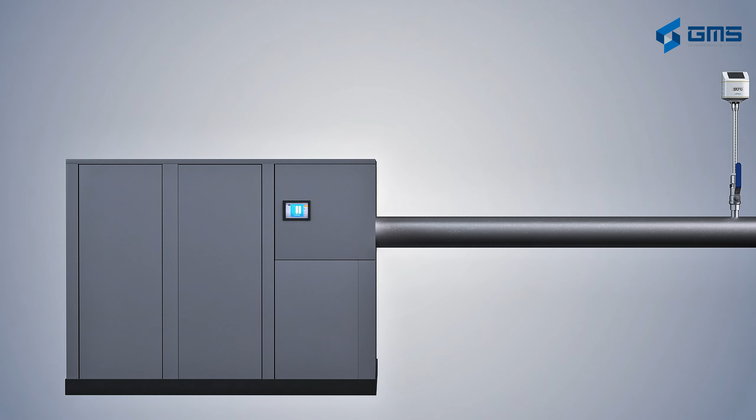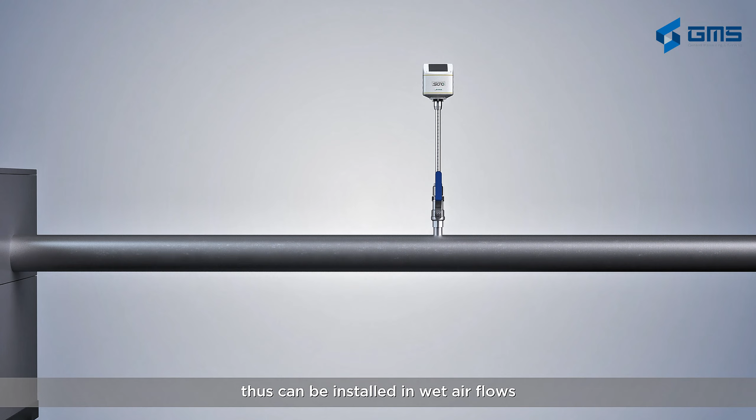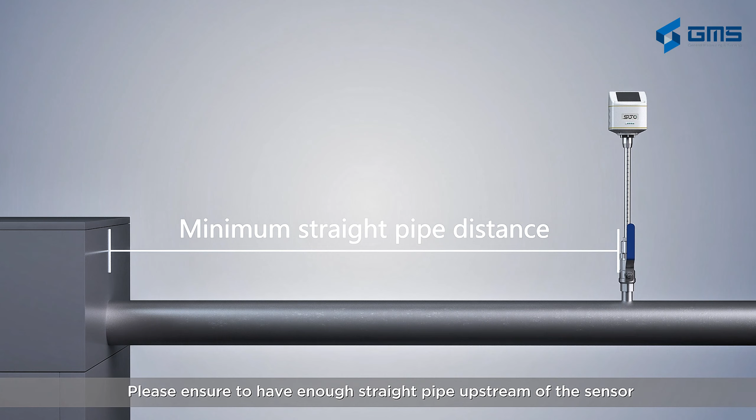In this video, we are going to demonstrate the installation and configuration of the SUTO iTEC Pitot flow meter S430. This flow meter is perfectly suitable to measure air delivery of compressors, thus can be installed in wet airflows. It's inserted into the compressed air pipe under pressure through a 3/4 inch ball valve. Please ensure to have enough straight pipe upstream of the sensor. Details can be found in the instruction manual.

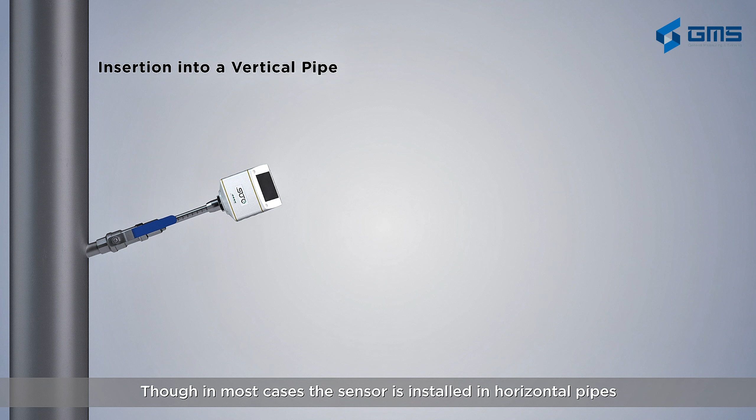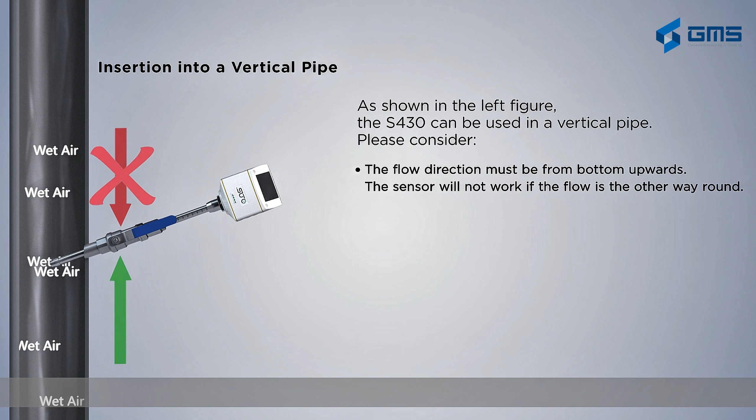Installation. Though in most cases the sensor is installed in horizontal pipes, if you have a vertical pipe installation, you need to consider two important issues. The flow must go from down to up. The sensor will not work if the flow is the other way round. The sensor cannot be installed horizontally into the pipe. It requires at least an angle of 10 to 20 degrees.

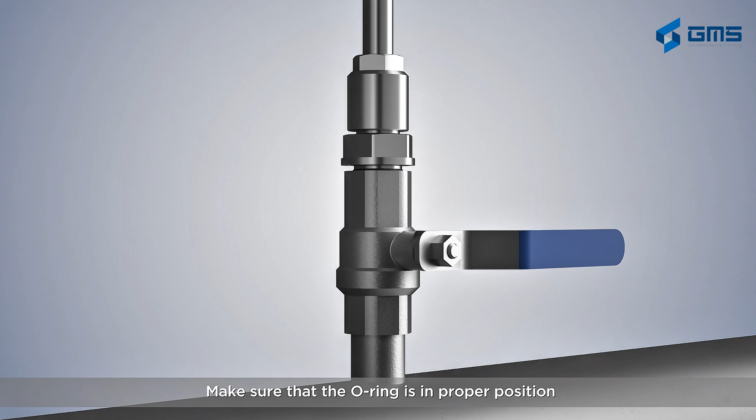First, we mount the sensor onto the ball valve. Make sure that the O-ring is in proper position. Use a spanner to tighten up the nut. Then we open up the ball valve, but leave the sensor outside the pipe at this moment.

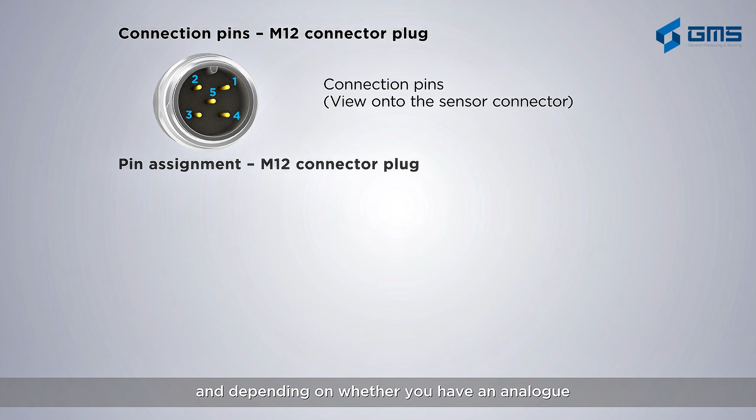Wiring and power supply. Next is to make the electrical connection. You connect the 24-volt DC power supply and, depending on whether you have an analog, Modbus or M-bus type, you connect the signal lines according to the pinning table. If you have ordered the sensors with the sensor cables, you can use the color codes to connect the signals to the right terminals at the monitoring system, which can be a PLC or any remote terminal unit.

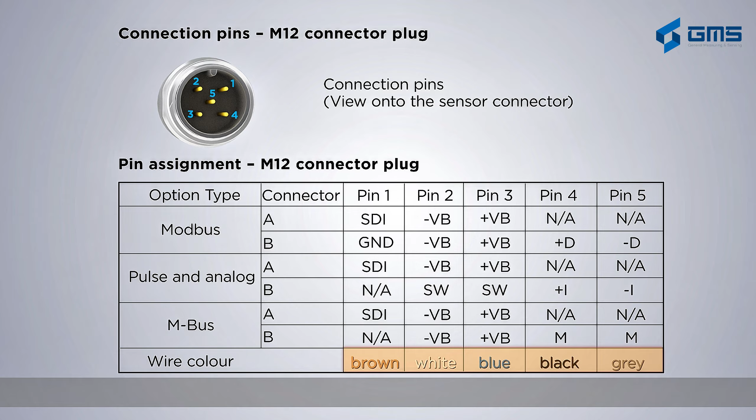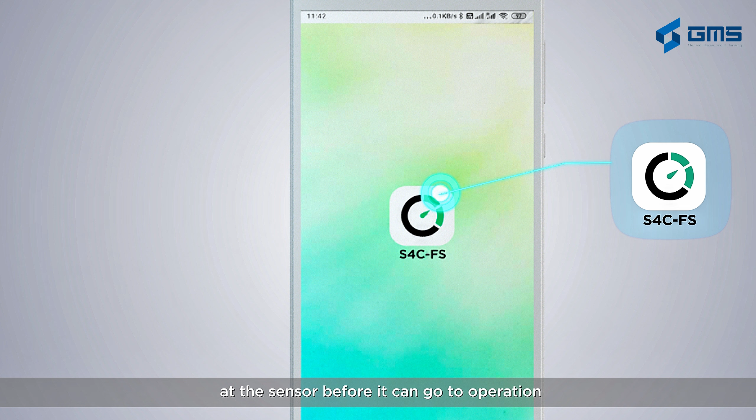If you have a sensor with the optional integrated display, the display will light up as soon as the power is on. Configuration through the mobile app. A big advantage of the SUTO flow sensors is they all have a Bluetooth interface and a service app for Android phones. This is a very convenient way to make the necessary settings of the sensor before it can go to operation. The app is called S4C-FS and can be downloaded for free from the Google Play Store or the SUTO iTEC website.

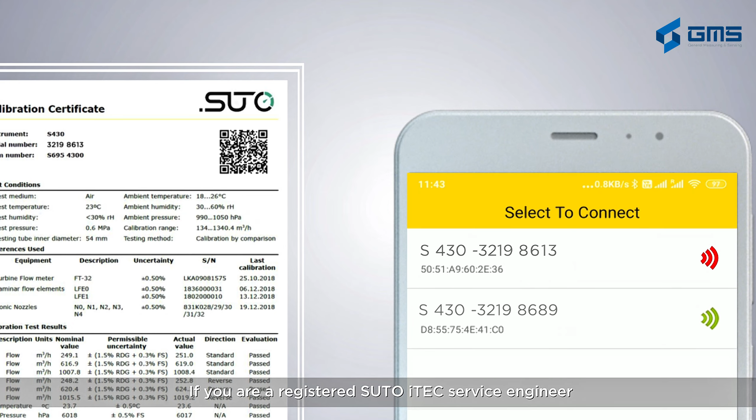We will now first demonstrate how to use the app. After startup, it will search for SUTO flow sensors nearby and list them on the screen. Behind each sensor is found a symbol in green or red. Red means you are not allowed to change settings, but you can watch the settings. To change settings, you must scan the QR code on the calibration certificate that came with the sensor. If you are a registered SUTO iTEC service engineer, you do not need to scan those QR codes. You have full access.

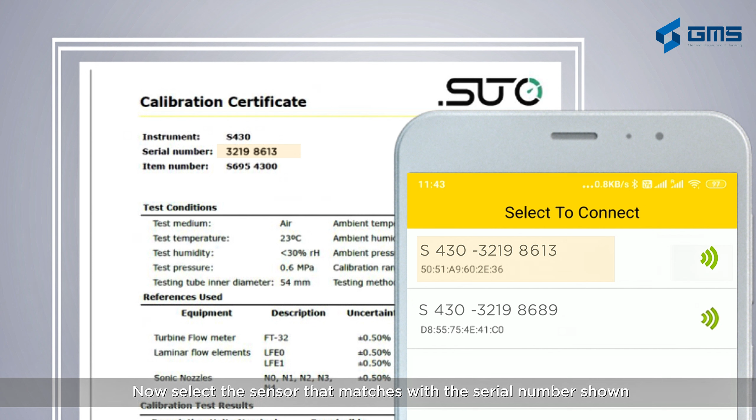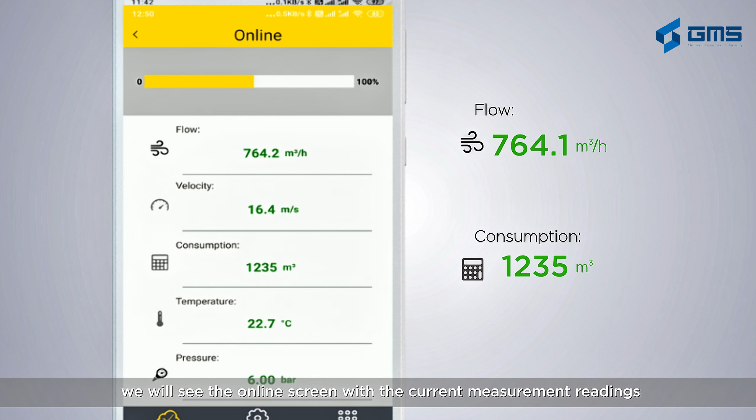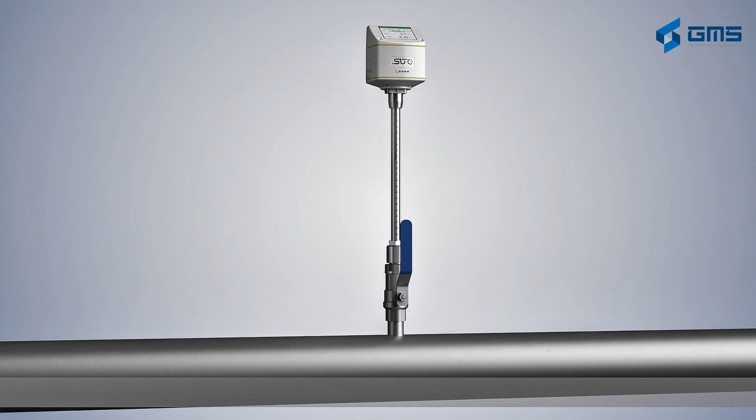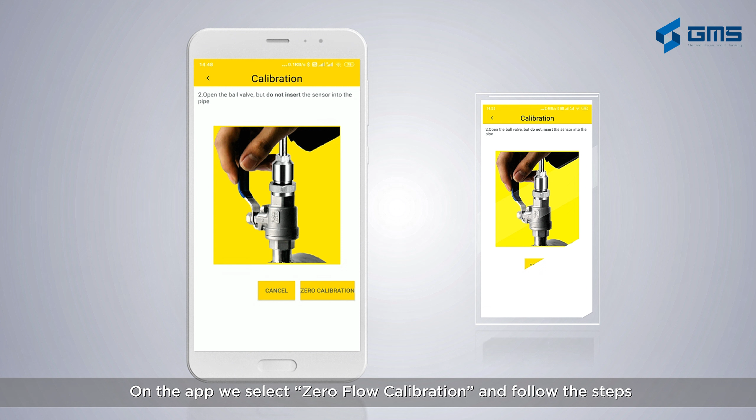Now select the sensor that matches with the serial number shown. After selecting the sensor, we will see the online screen with the current measurement readings. On the lower side of the screen, there is a button for settings, which we are going to use to make all required settings. Since we have connected to the sensor, we can now perform the settings. The first thing we must do is a so-called zero flow calibration. This is an absolutely required step on every S430 flow meter because the sensors must be calibrated before use. Please check that the ball valve is open, but the sensor still stays within the ball valve and is not inserted into the pipe. On the app, we select Zero Flow Calibration and follow the steps.

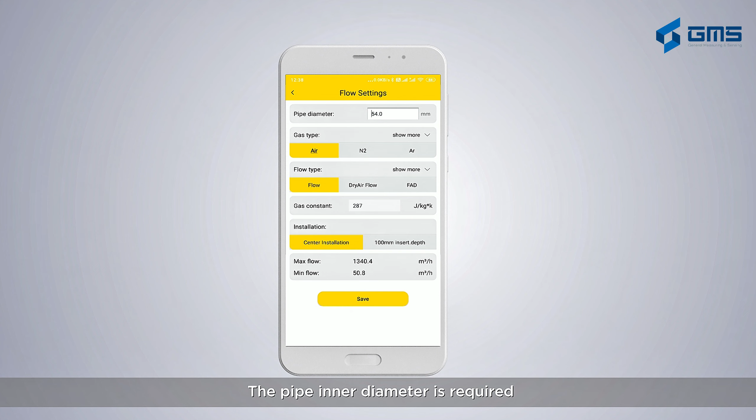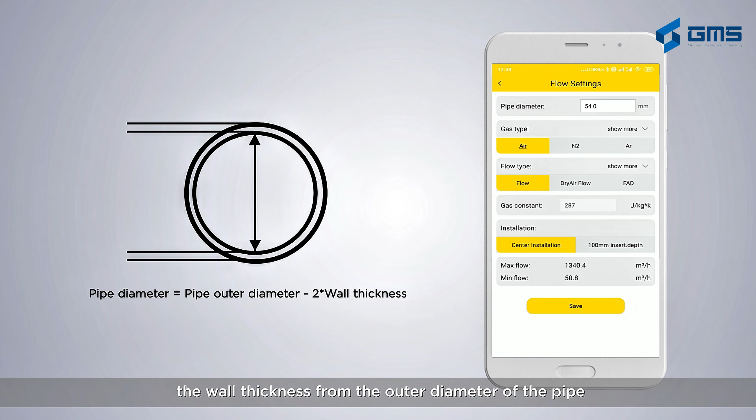After this is done, we must enter the pipe inner diameter into the sensor. The pipe inner diameter is required in order to perform the correct flow calculation. If you don't know it, measure it with an ultrasonic wall thickness meter and deduct 2 times the wall thickness from the outer diameter of the pipe. It's essential to be very accurate as it will influence the flow calculation significantly.

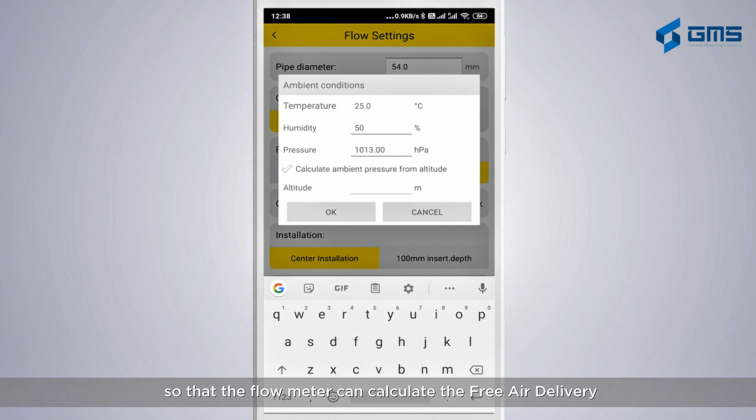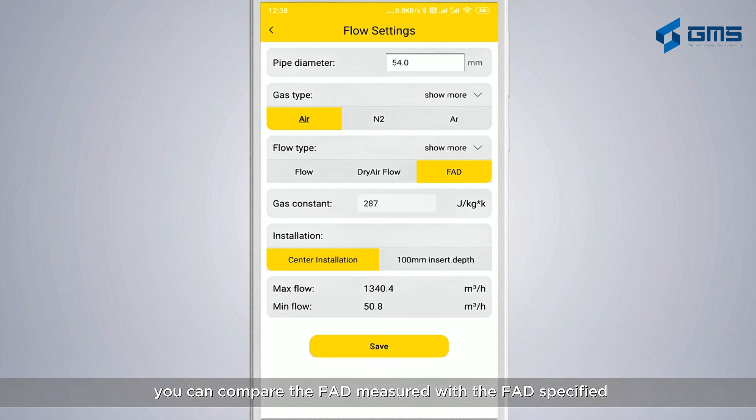Flow type selection allows to calculate the following flow types. If FAD is selected, you must enter the intake conditions in a separate dialog so that the flow meter can calculate the free air delivery. If you enter the same intake conditions as specified by the compressor maker, you can compare the FAD measured with the FAD specified. Dry airflow will calculate the usable flow rate after the dryer by removing the water component in the flow. Flow is the standard flow measured, which is the default setting that is usually recommended to be used.

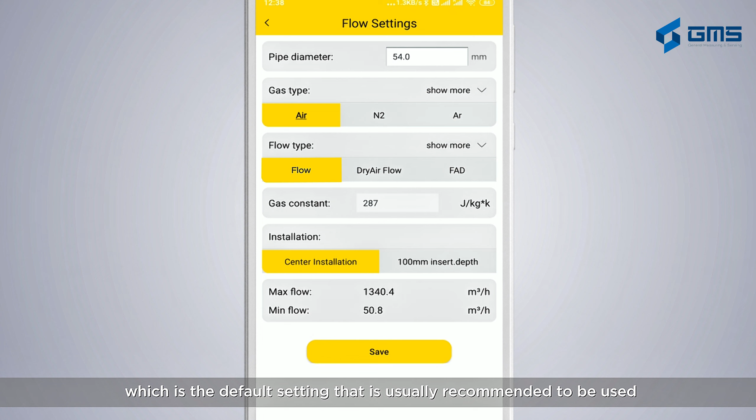The following settings are important to be checked and, if required, modified. Gas flows are always calculated to standard or norm conditions, which are close to ambient conditions. The reference conditions are not related to the pipe pressure or the temperature. Do not enter your pipe pressure or temperature under reference settings. This will lead to wrong measurements.

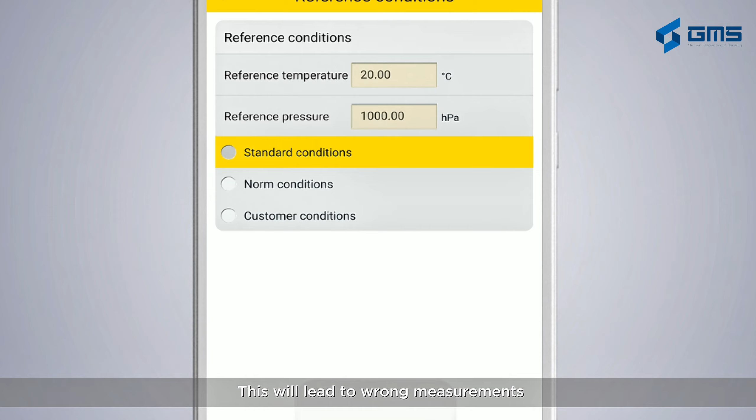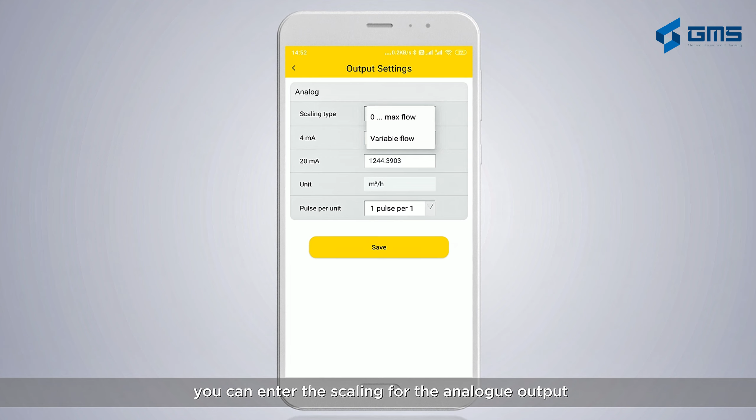Flow, pressure, and temperature units can be set. If you have a version with the analog output, you can enter the scaling for the analog output. By default, the sensor is scaled from 0 to max flow. There are a couple more settings which are not relevant at this moment. Please check the instruction manual for more details.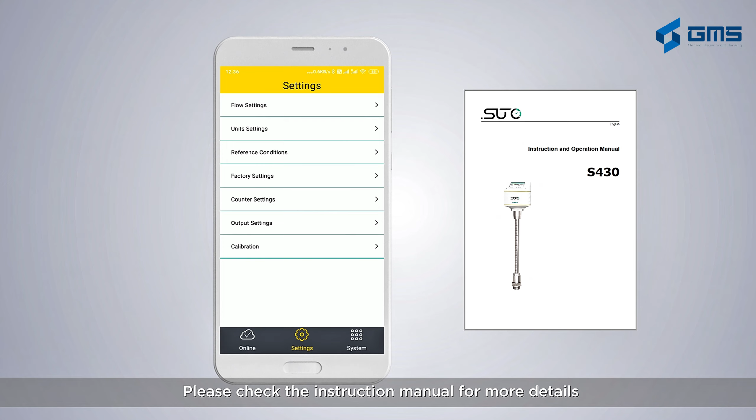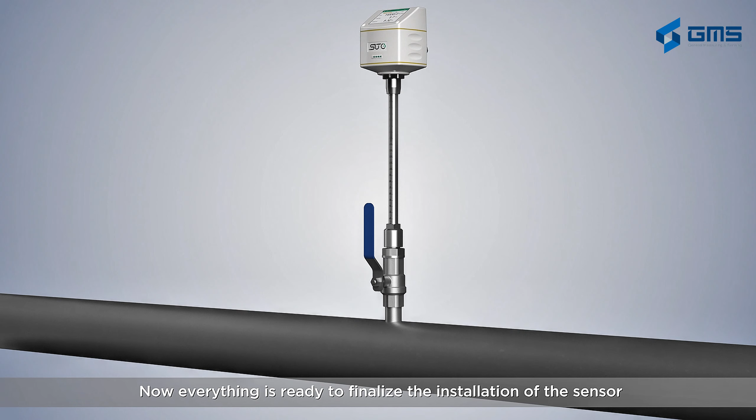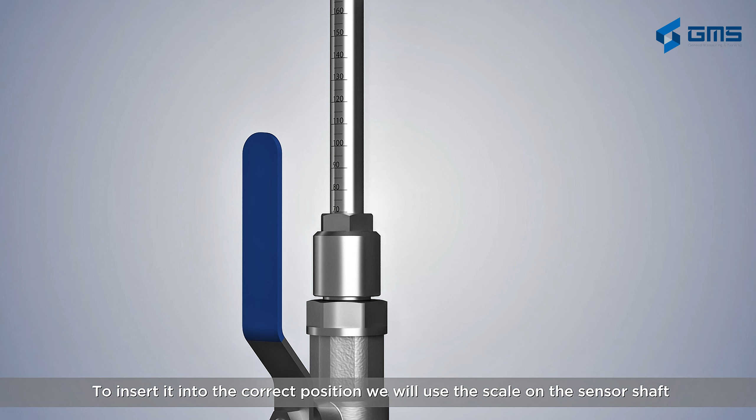Finalizing installation. Now everything is ready to finalize the installation of the sensor. The next step is to insert the sensor into the center of the pipe. To insert it into the correct position, we will use the scale on the sensor shaft. How do we get the insertion depth? Here's how we do it.

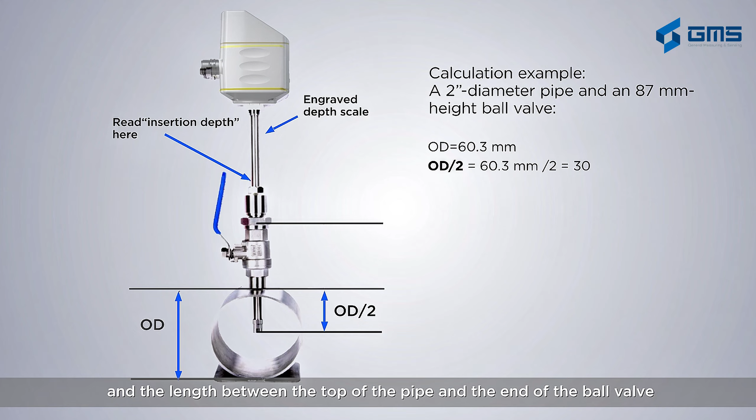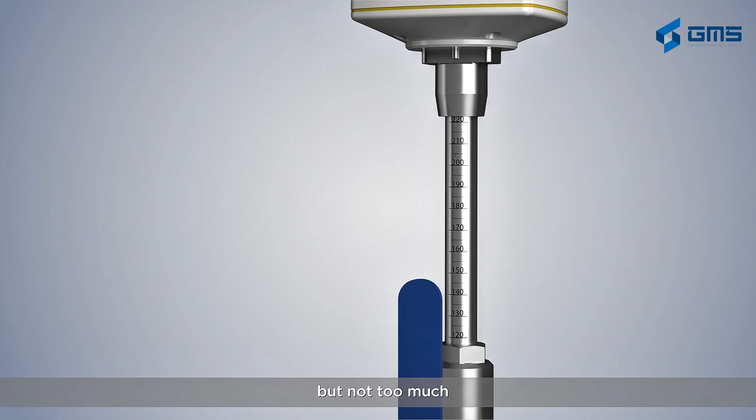It's recommended to first measure the outer pipe diameter and the length between the top of the pipe and the end of the ball valve. We then do a simple calculation by adding to the length measured half of the outer diameter. The result is the insertion depth. We now press the sensor into the pipe until we see the calculated insertion depth just above the locking nut. When we reach the correct position, we tighten up the locking nut slightly, but not too much. Just enough to keep the position, because there's another step missing.

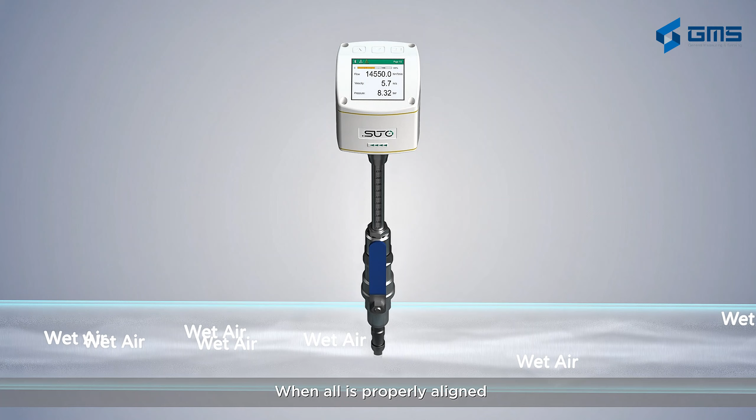We must align the sensor to the pipe. Make sure the flow direction matches up with the arrows at the sensor. When all is properly aligned, we tighten up the locking nut and the installation is finished. That's it. The installation and configuration is done and we're ready to measure.